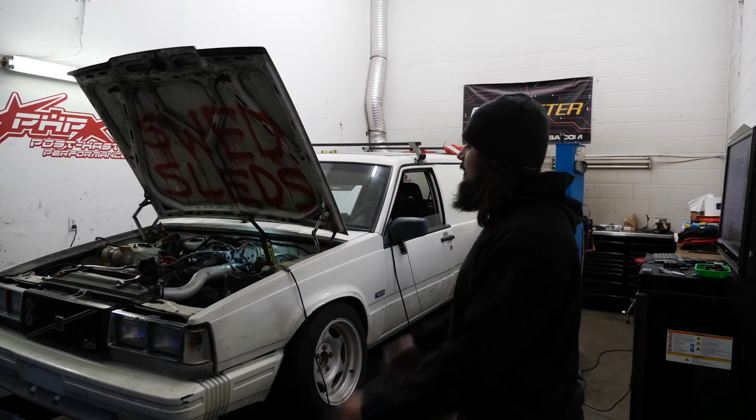So as you can see, we have the Panel Wagon on the dyno at Post Haste Performance here. Over the last little while we've been fine tuning and getting all the mechanical parts put together. If you guys are new to the channel, I'm going to go over the setup of the engine.

I've said this in the last couple videos, but basically it's a stock B230FT bottom end from a 1994, it's got piston oil squirters, and it's got a 531 head imported from Europe. This is actually the head I ran on my NA car, Miss Huff. If you guys are new to the channel, go check that out, lots of videos about that car.

So this head is a 531 automotive head. If you guys don't know, a 531 is just a slightly better flowing version of the 8-valve head. This one's ported out, and it's got a crazy camshaft in it, about 302 degrees of duration, about 13 millimeters of lift. The head is shaved 2 millimeters, and that gave it a lot higher compression.

On my NA car it was about 11:1 compression, maybe a little more. This being a turbo block and not an NA block like my last car, it's about 1 point lower in compression. So running this thing on pump gas, it's got an HE341 Holset turbo.

We ported out the wastegate, the internal wastegate. We opened up the hole as much as we could while still being able to maintain the factory flapper on the wastegate.

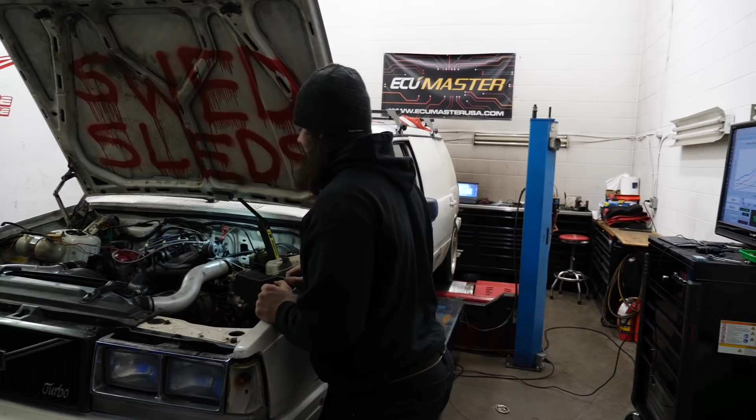So what else we got going on here? It's got an aftermarket intercooler. It's being tuned on an EMU Black standalone, full standalone. We got Dan, he's the master at the EMU Black and all other standalones really, the guy's just kind of a wizard.

So he's got it on the dyno here, and he's actually already made some pulls. We've been messing with a few things. Mikey just got here with his camera.

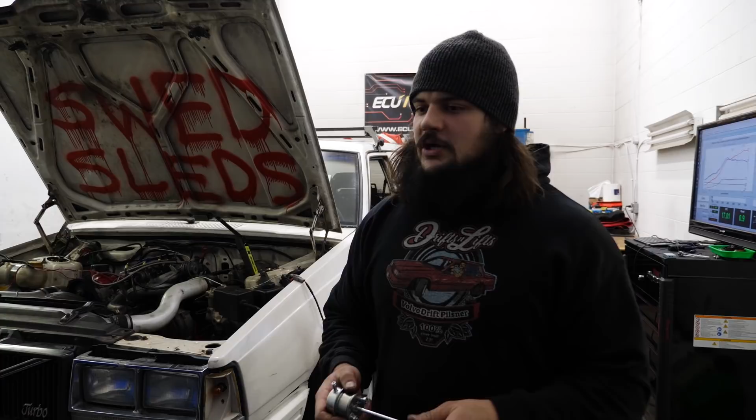Earlier on in the day we were dealing with a boost issue. We could not get the boost to go lower than 20 pounds, and the culprit was this eBay crappy actuator. So we had a better actuator, shout out to my guy Giovanni, he sent me a good actuator all the way from Florida. Thanks to Giovanni for that, that was really nice of him. We got that on the car now, and now it's holding 20 PSI of boost steady, which is awesome.

So Dan's actually been able to do a little bit of tuning on it, we've taken a few runs now. Fuel pumps, we got the stock fuel pumps in it, and right now they're actually not a limitation yet. We have 630cc injectors, and we're running the stock 3-bar fuel pressure regulator.

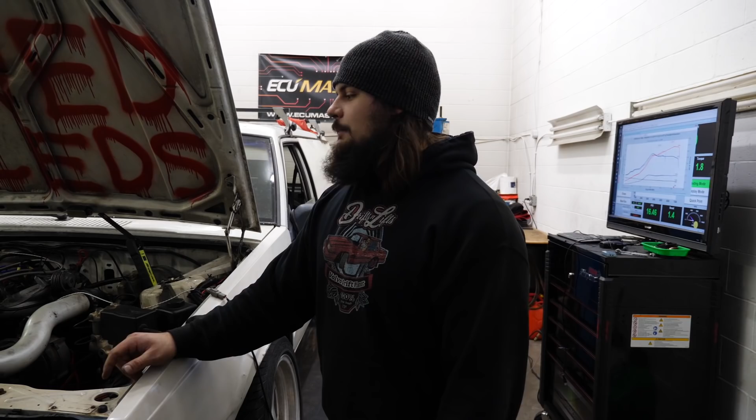This motor has stock rods in it, that is also a limitation. Being about 10:1 compression ratio on pump gas, this thing so far, as the graphs will show you, is very prone to knock, so we can't run any timing in it. Dan really wants me to do E85, this motor would be awesome on E85, we'd probably make in the 400 horsepower range. But knock is a huge limitation right now, so that's what we're kind of dealing with.

We have made some decent pulls, and running like no timing in it, the turbo doesn't actually want to run less than 20 pounds of boost. This actuator is opening at 10, but the turbo's not really going less than 20. There's no way to make it go less.

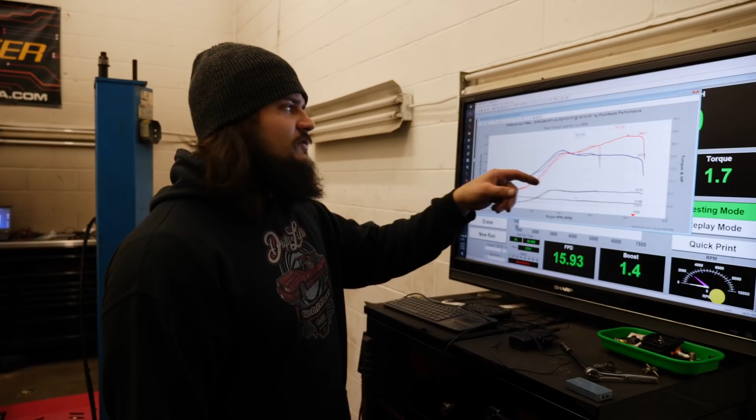So if we check over here, here's kind of the graphs that we've been working with so far. He hasn't really fine-tuned it yet, but it's got a couple good pulls. I'm actually really happy because I've always wanted 300 horsepower, that was actually kind of the goal of this motor, 300 wheel horsepower, and on our best run, we actually just made that, 301 horsepower to the wheels.

For all you M46 haters, my M46 is still holding in here. I don't know, just watch, this M46 is gonna last really long and you guys are gonna be confused how it happens. The reason is because instead of gear oil, I used holy water. So it's just got a thing going for it now.

Anyway, so back to this graph. Really cool, if you guys remember the Miss Huff tuning videos, that motor actually had a really similar power band. This being the same head and the same cam setup, it's gonna have a really similar curve, just way more power on top because it has a bunch of boost into it. So as you can see, check this out, Mikey.

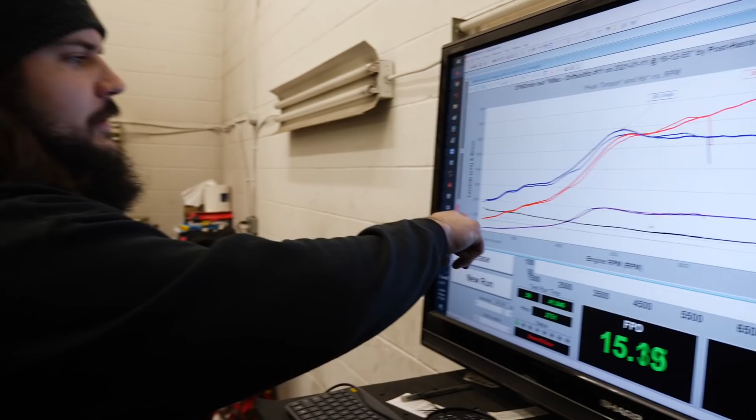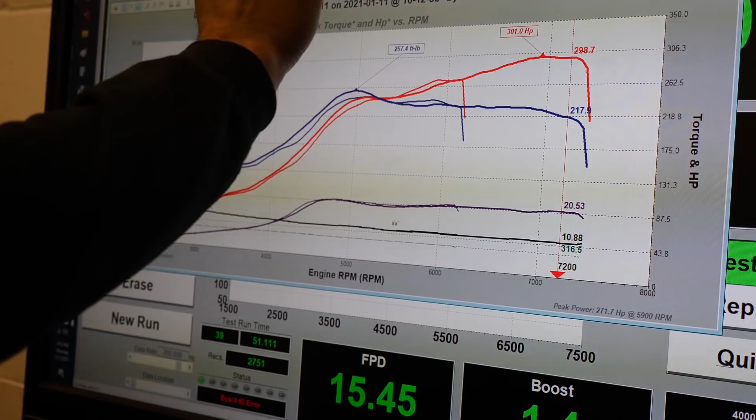So power, as boost starts ramping up, we're not really getting full boost at 20 PSI until about the 4,500 range. As you can see, that's when the peak torque starts to creep up. Not a very torquey motor, and that's actually kind of good because I don't have a good transmission in here, and what kills the M46s is torque. So we're at about 260 foot-pounds, 257, and that's happening right around the 5,000 RPM range.

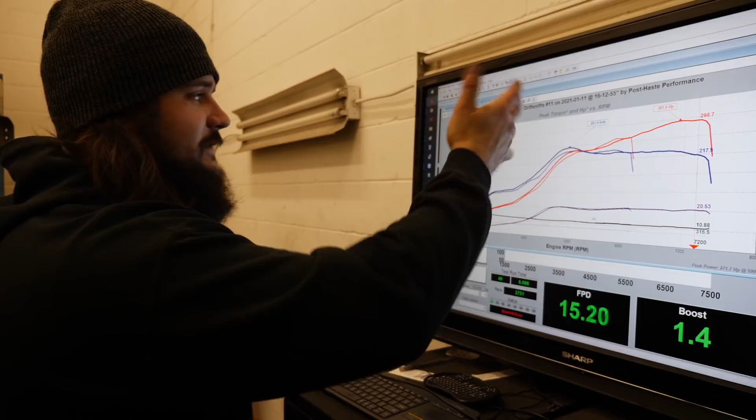Once that hits, this motor is actually pulling really nicely out. It's able to maintain power, not really dropped off quite yet, and we're already into the mid 7,000 range. So I told Dan he can set the rev limiter at 8,000, that's where I'm comfortable at. Looking on the forums, that's what a lot of people say is kind of the limitation of RPM on these blocks.

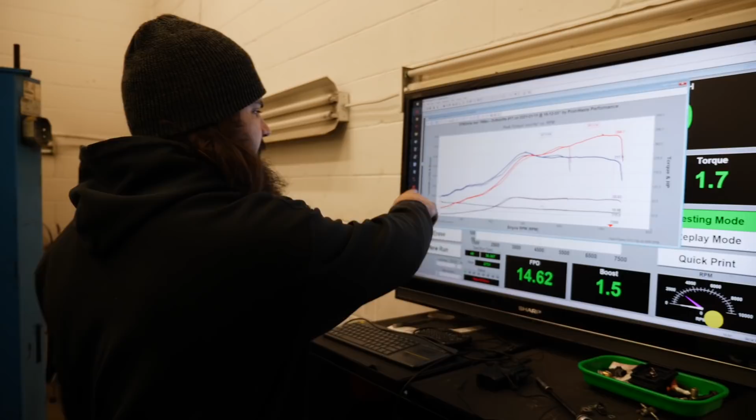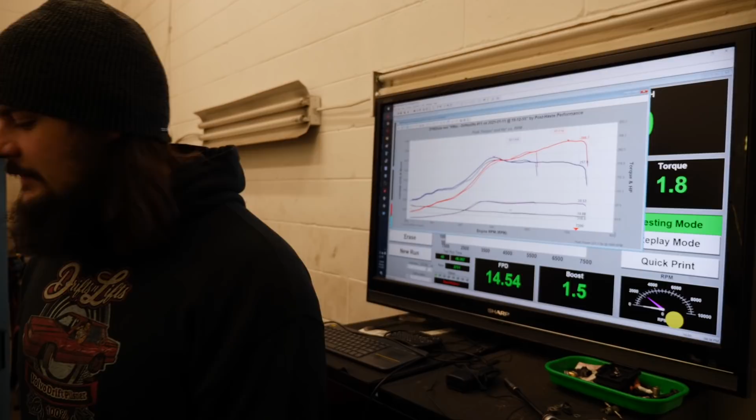But yeah, so I'm excited, Dan's gonna come back in here. We actually just dealt with an injector O-ring leak, so I put better O-rings in it. I think it's gonna be good now. As you can see, air fuel is keeping it around the 11 mark, I'm pretty happy with it. Fuel pressure on the stock fuel pumps has not dropped off, so that means they're able to keep up with the demand that we're asking of them.

That's really good, guys, I'm stoked. So we'll get Dan back in here in a little bit, and we'll do some more pulls, and hopefully wrap it up, make a nice solid tune, no detonation. Right now we don't really have any detonation or knock, which is good. Being on pump gas, we're really limited. But on E85, this motor would make, we'd be able to run way more timing, way more boost. It would make literally 400 wheel plus probably. So anyways, we're gonna keep going with it and see where we get.

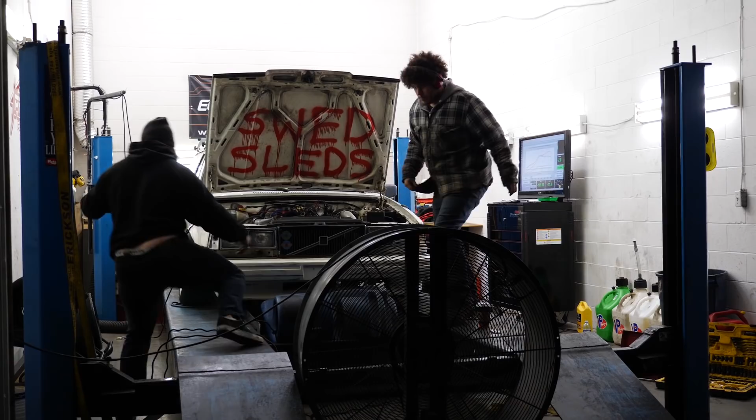Alright guys, so she is on the dyno now. As you can hear, the wagon has the same kind of lumpy idle that Miss Huff had. A little bit less compression, and obviously a different header, and it's going through a turbo now, but it's still got that clumpy, lumpy idle, which is good because I was hoping that wouldn't go away. So yeah, let's see what the wagon can do. I think we're gonna be kind of like 300 horsepower, that's kind of what we're gonna be working with here.

So scary, I'm kind of nervous. I don't want my motor to blow up. I won't be that sad if it does, but I'd prefer not to have to source another squirter block. Whatever.

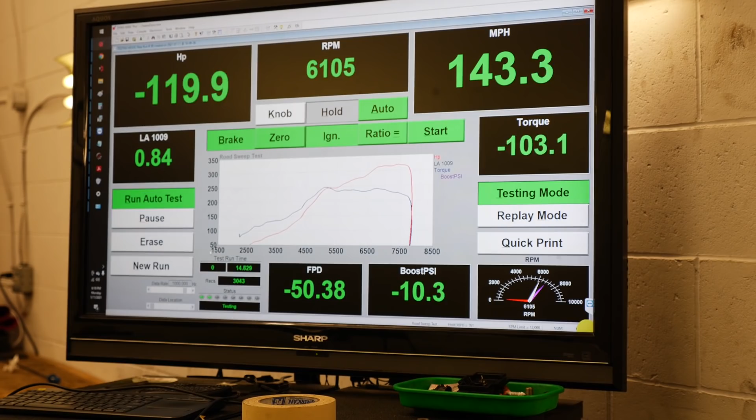Alright guys, so that is pretty much a wrap up of the tuning side of things. So we got our graphs here. We're gonna go over kind of what happened and maybe what we can improve on next time, that kind of thing. So we actually have a couple graphs to compare to my previous Volvos that I tuned at this dyno shop. Dan tunes all my Volvos.

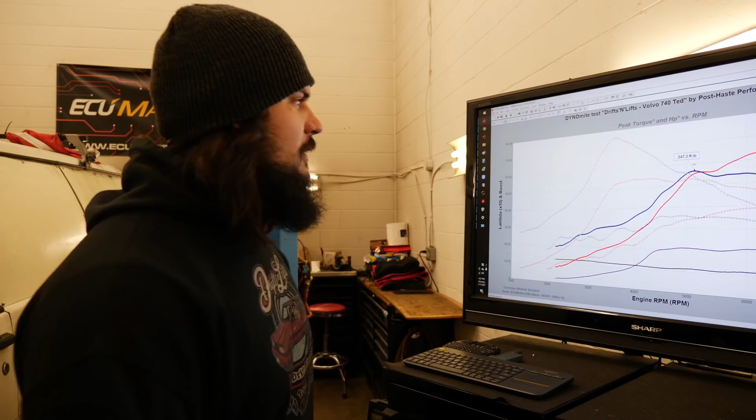So anyways, what we got here, I'm super happy. This thing made 317 wheel horsepower at 7,400 RPM. So peak power is way up there. This motor is gonna pull super hard up top. I'm really happy with that.

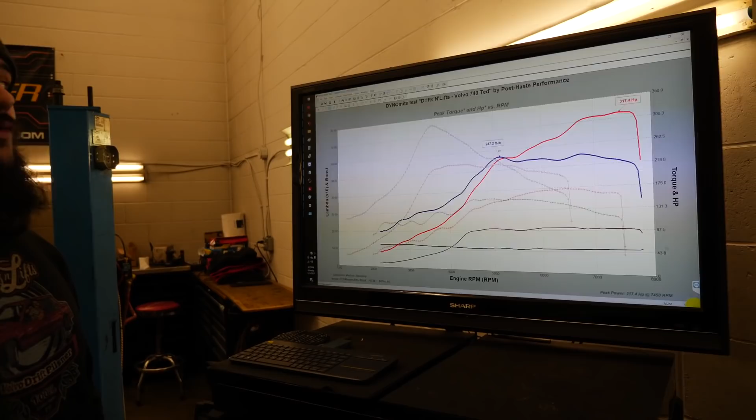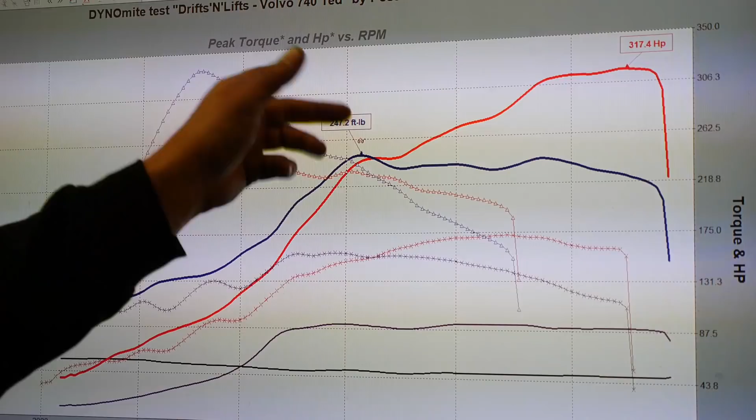It did not make a lot of torque actually, as opposed to how much horsepower it made. So 247 foot-pounds was the max. Actually, I think if we moved it, it was about 250 was the max. So definitely this cam and head setup is way different than my previous setup.

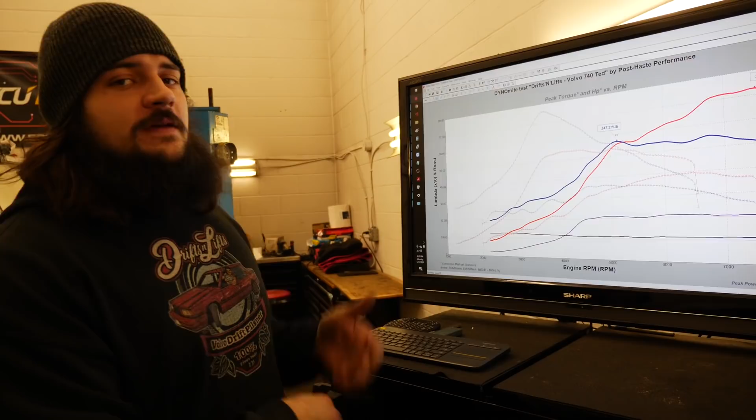So over here, we actually have Goldie. If you guys remember, Goldie was a stock 530 head. It had stock compression ratio. It had like a T3, T4 Garrett on it when we were running a pile of boost. And the boost on that car was spiking to 25 and then leveling at 20.

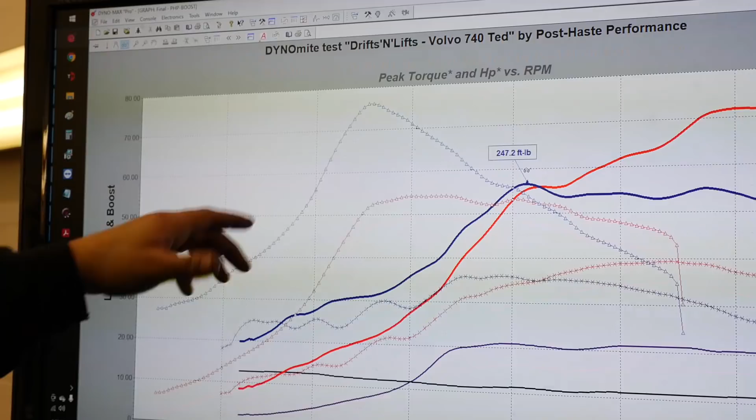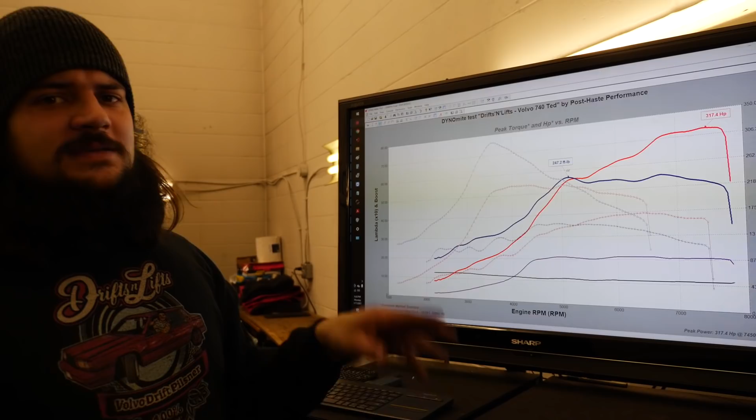So actually, if we look here, it's insane to look at the difference of these two graphs. Goldie was all torque. If you look at this graph, it's almost like a diesel as far as torque goes. So blue is torque and red is horsepower. And also this other graph over here, we got Miss Huff, so we're gonna compare it to that after. So Goldie actually made like 237 wheel horsepower and 330 foot-pounds of torque.

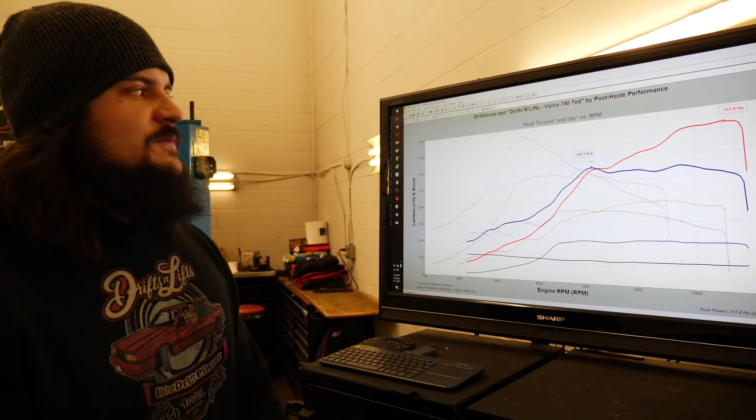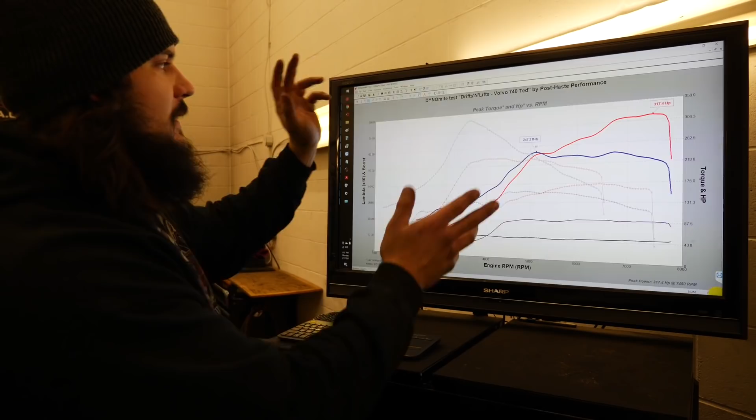So it's literally the opposite of what the Panel Wagon's making. Panel Wagon makes about 300 horsepower, and Goldie was making about 300 foot-pounds of torque. Then Panel Wagon's making 247 foot-pounds of torque, and Goldie was making like 237 horsepower. So these graphs are basically flipped around. Panel Wagon's definitely gonna pull harder, it's gonna feel like a more lively engine.

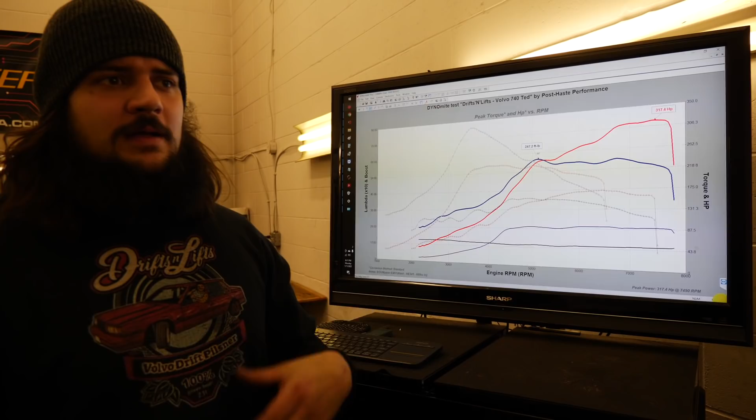Goldie had crazy torque, and that's why I snapped M46s like no one's business in that car. As soon as you pinned it in third gear, it would spike to 26 pounds, make over 300 foot-pounds, and it would just roast the gear.

So maybe we might actually be able to have the tranny stay intact. 250 wheel torque is actually kind of the ragged edge of the M46's third gear, so it may hold, it may not, depending on how hard I drive it.

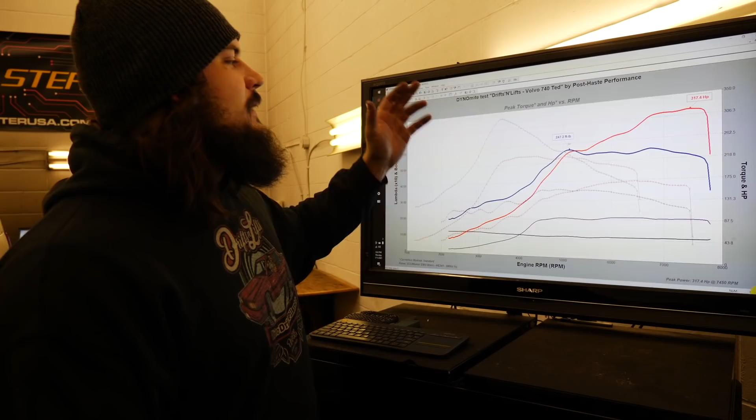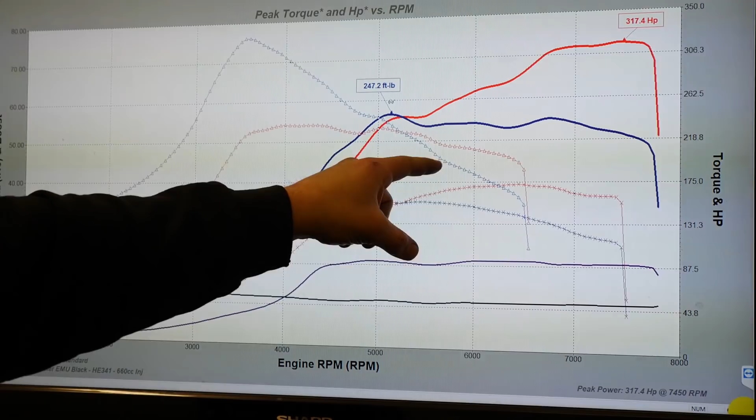So Goldie was interesting, but it made a ton of torque, it wasn't a super lively revving out motor. As it started to fall off, even after 5,000 RPM, the power started to fall off pretty bad, and after 6,000, it wasn't making much. So Panel Wagon is way better in that sense.

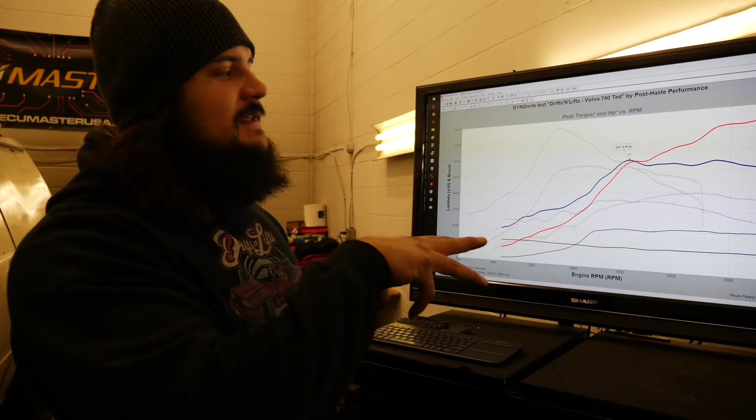We actually could have revved this thing all the way to 8, and it probably still would have made more power up there. The graph kind of tapers off, and it pretty much would have stayed flat, I think, if we revved it up to 8. I was like, holy, that's a lot of RPM, so we ended up cutting it at 7,800 RPM for our soft rev limiter. So cool thing, we'll compare this to Miss Huff.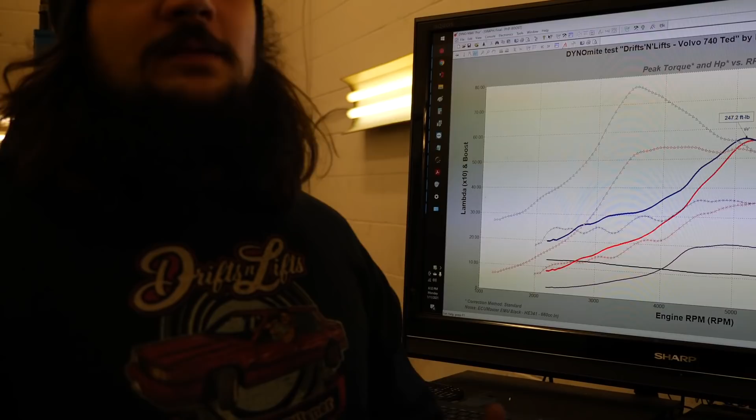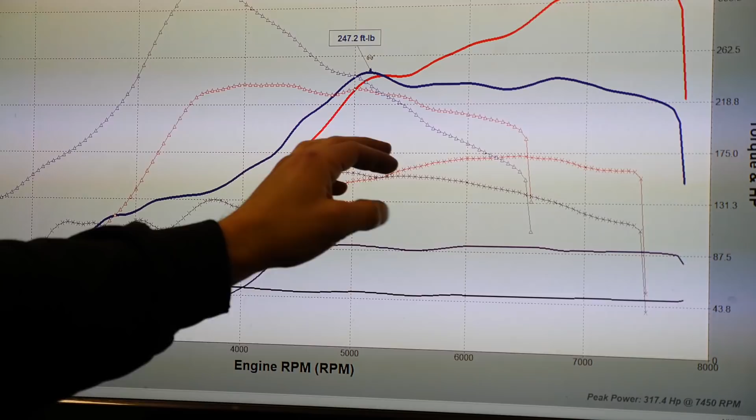So this is the Miss Huff graph. Obviously Miss Huff was NA, so it doesn't have a turbo. It's not gonna make near as much power, but it's just interesting because Miss Huff had this exact same head setup, just with a little bit more compression, about 1 point more. So you can see where the power starts to get good is about the same. It pulls up in the same RPM range.

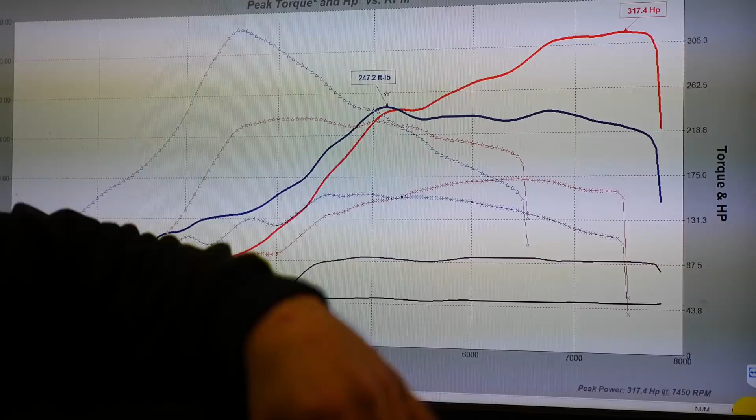Miss Huff was nice around the 7,000, 6,500 range. Panel Wagon's even farther because you have boost being able to just stuff air in there, so it was actually able to carry the RPMs out and maintain power up there even better. So at 7,800, this motor is gonna scream, guys. I'm super excited to film the video when we take this for a ride, it is gonna be gnarly.

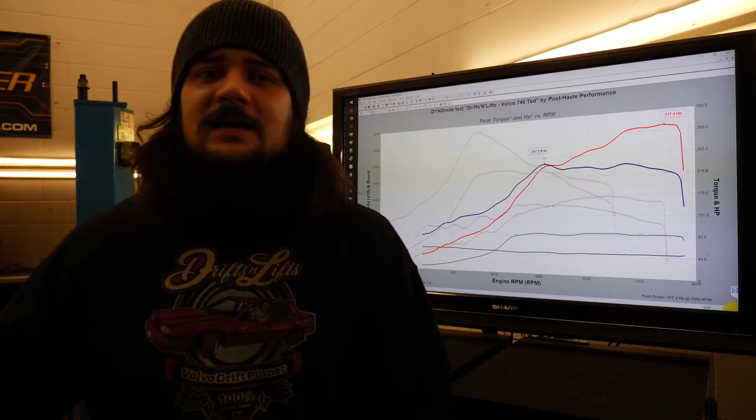I've never had a Volvo making this much power, so I'm pumped. And the idle sounds wicked, it sounds like Miss Huff did, coming out that 3-inch side pipe, no muffler. The only muffler is a turbine wheel in the turbo.

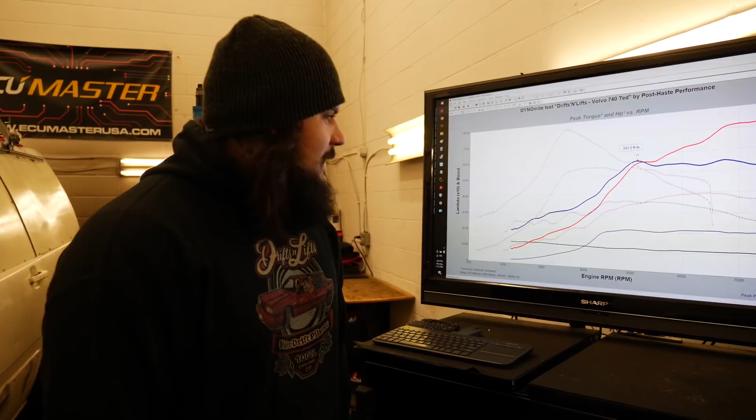So yeah, guys, I'm pumped. I'm really excited to take this thing for a rip. So we're gonna do that on another video, like I said, take it out in the daytime.

Funny thing Dan mentioned to me is that hitting the limiter in 4th gear, so M46 is a 4-speed, we are getting 144 miles an hour of wheel speed. So I could bring this thing up to 144 miles an hour. Let me know in the comments if you wanna see a video of me bringing this up to 144 miles an hour on the street somewhere. I mean, on the track in Mexico somewhere.

Yeah, so anyways, guys, that was basically a wrap up of today's video. Good old cheap Holset turbo did pretty good on this red block. So if we wanted to make a better, more optimal setup, we would go less compression and a little bit less cam, so we were pretty knock limited.

Dan did not have any timing in this thing. Up here, I think it was like 4 or 5 degrees before top dead center. In this range, it was like 3 or 4, which is really low.

This motor with E85 would make a ton more power. We're talking 400 wheel horsepower. I need bigger injectors and a better fuel pump if I want to do that, but that is going to be in the future where we'll be doing that.